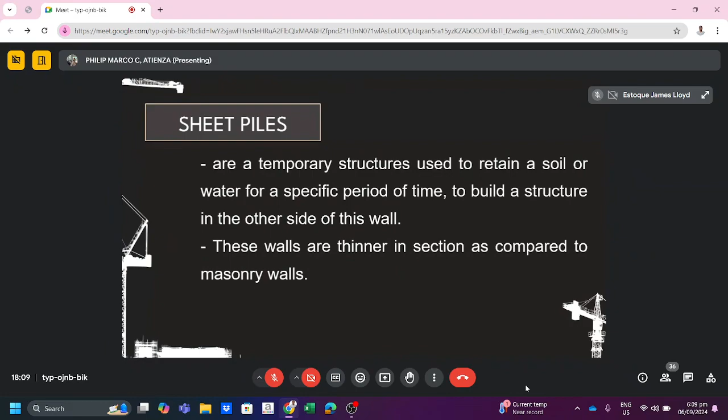So these walls are thinner in section as compared to masonry walls. So mao yung different usage sa ato ang sheet piles. So first is the waterfront structures in building wharfs and piers. And then second one is building diversion dams, riverbank protection, and then retaining the sides of cuts made in earth. So mao yung different nga usage sa ato ang sheet pile nga walls.

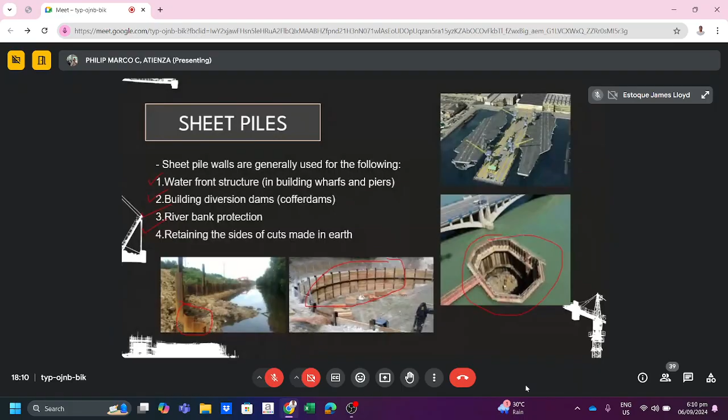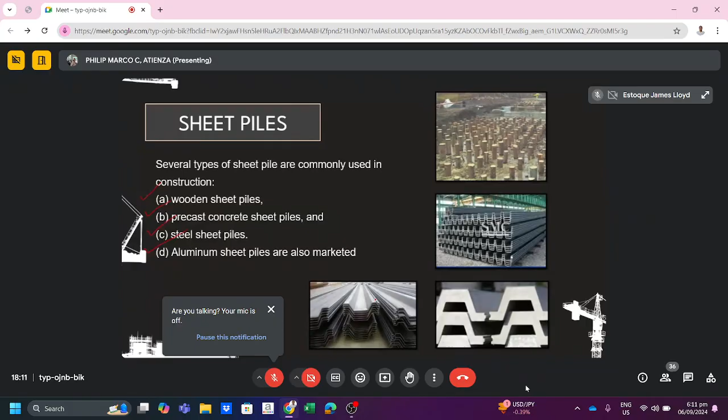So what are the several types of sheet piles commonly used in construction? First is the wooden sheet piles. The next is the precast concrete sheet piles, and then commonly used during construction is the steel sheet piles. And then the last one is the aluminum sheet piles, which are also marketed. So mao ni ang different types of sheet piles: wooden, precast concrete, steel, and lastly aluminum.

For the timber sheet piles or the wooden sheet piles, it is used commonly for temporary and light structures that are above the water table. It is also used for short spans and to resist light lateral loads. If used in permanent structures above the water level, it requires a preservative treatment, and even then its lifespan is short.

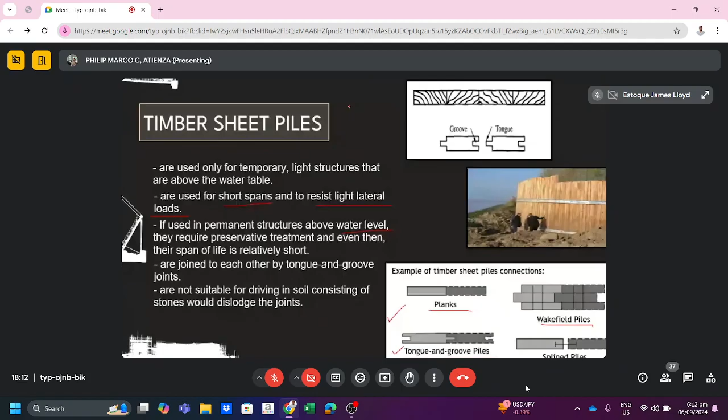Next is the reinforced concrete sheet piles. Usually the connections used are tongue and groove joints. And of course, since it is concrete, it is thick. It takes about 150 to 250 mm. So therefore, it is relatively heavy and bulky.

And since it has a large dimension, it displaces a large volume of solids during driving. So the design of piles has to take into account the large driving stresses, and suitable reinforcement has to be provided for this purpose. The sheet piles come panel per panel, not one whole length, then connected.

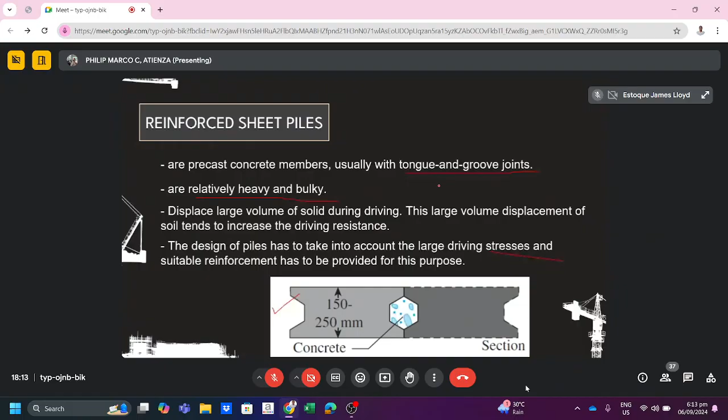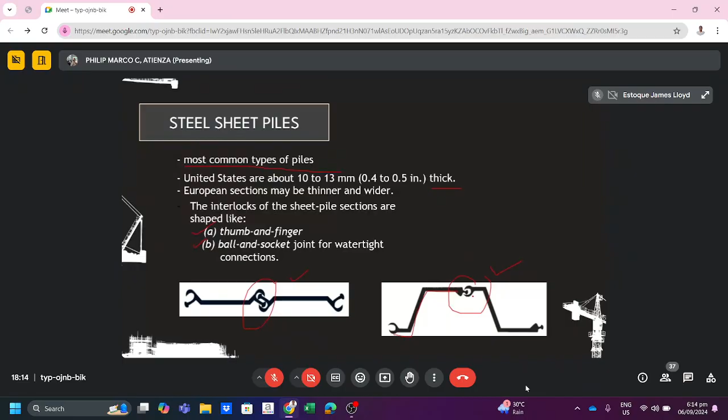And then next is the steel sheet pile, the most common type of piles. In the US, it is about 10 to 13 mm thick, so it is very thin. The interlocking of the sheet pile sections are shaped like the thumb and finger, and the ball and socket joint for watertight connections. This is the top view, and these are the connections, where two sheet piles are connected.

So what is the importance of steel sheet piles? Steel sheet piles are resistant to high driving stresses developed in hard or rocky material. Also, since it is steel, it is lighter in section. And it can be used several times, so if used in a certain project, it can be utilized again in the next project that needs sheet piles.

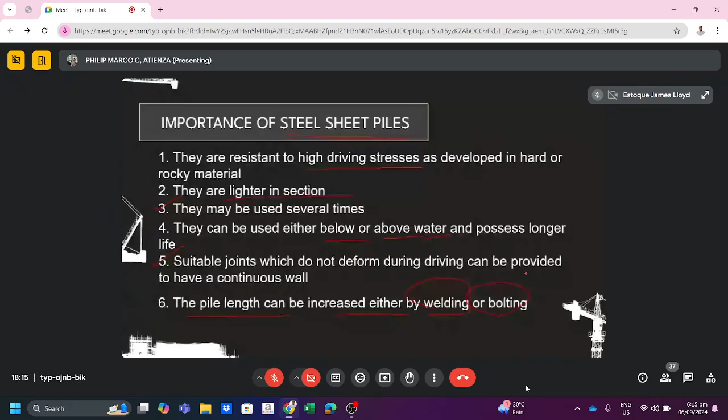Also, pwede siya magamit sa either below or above water level. Suitable joints which do not deform during driving can be provided to have a continuous wall. And then lastly, ang pile length can be increased either by welding or bolting. So, mao ni ang common nga ginabuhat sa steel sheet piles.

So, klaro ba class? Sabtan na so far? Any questions? Tara, sige.

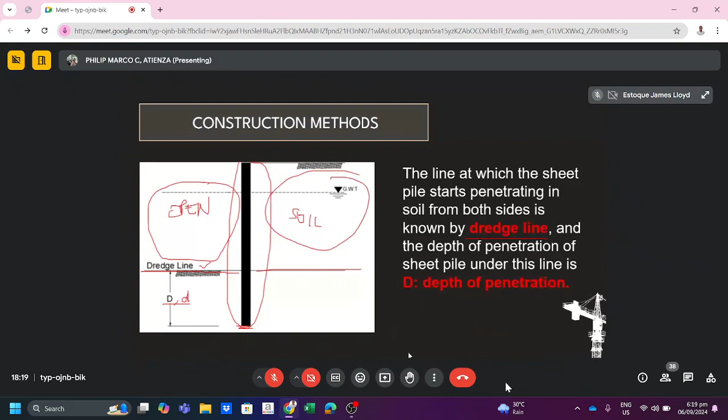So next, there are two types of sheet piles. First is the cantilever, and then second one is the anchored. So ang difference lang nila is sa anchored, naa siyay anchor. And then for the cantilever, ang sheet pile lang mismo. So gi-utilize lang niya ang depth of penetration. If this is our dredge line, so that is our depth of penetration.

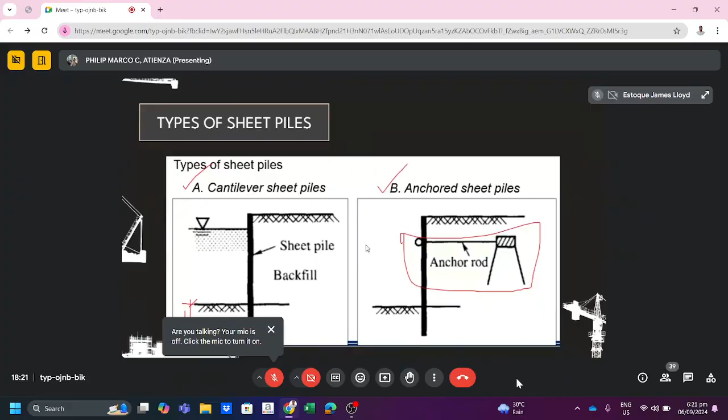So okay ra. So next is mag-solve the problems using the cantilever and the anchored sheet piles. Kita ninyo class? Sir. Sige, sige.

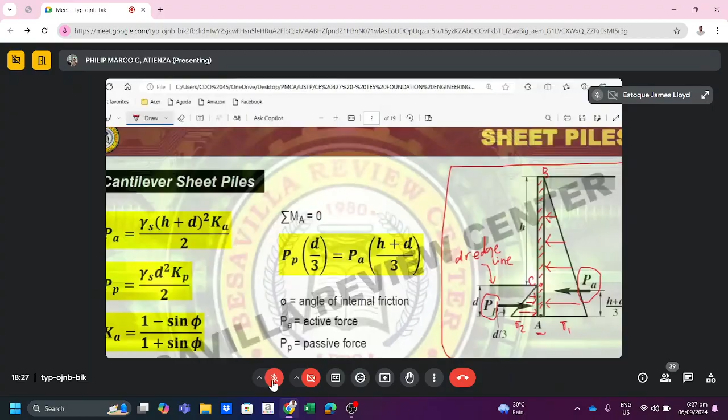Itong topic na to last time, we have the at rest, the active, and then the passive. So mao na ang PP, that is a passive force, and PA is the active force. And then the location of these forces from the bottom, so mao ni siya ang location niya, no, that is 1/3 of the triangle.

So H plus D is the total height of the right side nga pressure diagram. So H plus the depth of penetration D. That is from point B to point A. So mao nang H plus D. Then 1/3 ana mao na ang location sa atong active force from the bottom.

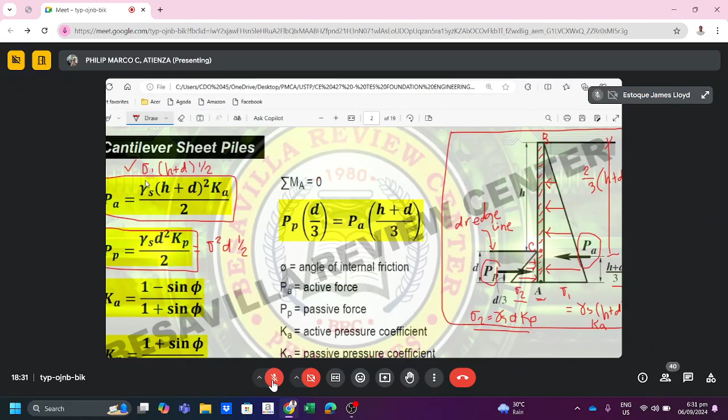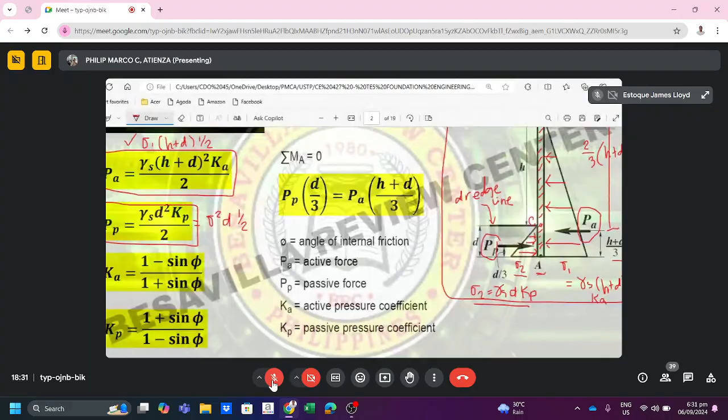And then, the coefficient of active pressure Ka is equal to 1 minus sine phi over 1 plus sine phi. And then Kp, the coefficient of passive pressure, is equal to 1 plus sine phi over 1 minus sine phi. So if we take moment about point A, summation of moment about point A, we can get this formula or the equilibrium.

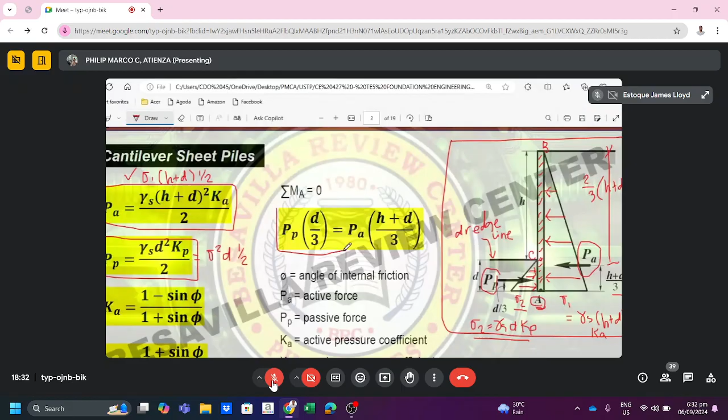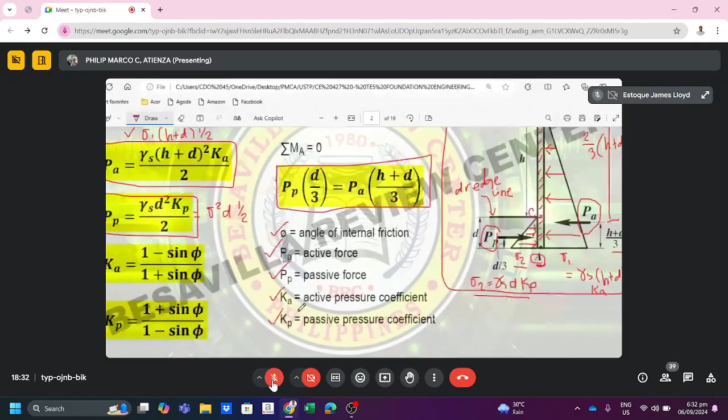Where again, theta is the angle of internal friction, PA is the active force, PP is the passive force, Ka is the active pressure coefficient, Kp is the passive pressure coefficient. So, ingon ani lang ang atong cantilever sheet pile problems. Ang critical lang ani is to interpret the word problem into a figure. After mag-draw mo sa figure, mag-draw ta sunod sa atong pressure diagram. Okay? So, any questions so far?

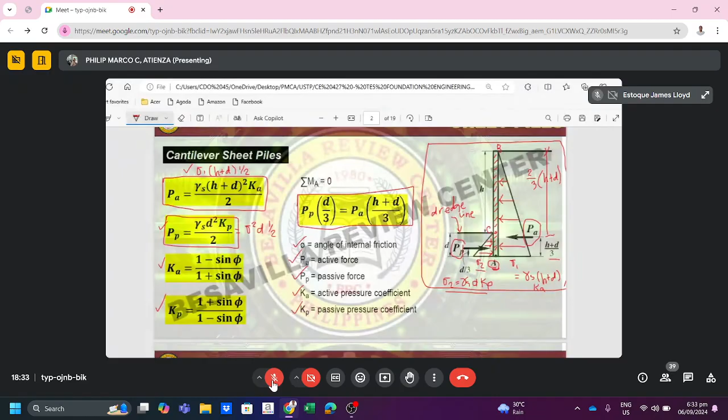Wala. Sige, let's have a sample problem. So we have here a sheet pile acting as a cantilever retaining wall that retains a soil 2 meters high with an angle of friction of 30 degrees and a unit weight of 18 kilonewton per cubic meter. So ang first gipangita is determine the required depth of penetration, that is D, with an allowance of 20% for shear development, and then assume that the pivot is at the foot of the pile. Second one is to determine the total active force on the sheet pile, and then the third one is the total passive force on the sheet pile.

So, i-draw ni mo na una ang ato ang given problem. So, first is cantilever nga retaining wall, this one. And then, ga-retain daw siya of 2 meters. So, from the top of the retained wall, let's say this is point B, up to the dredge line or point C, that is 2 meters. And then, ang naghatag dyan, angle of internal friction, that is theta, 30 degrees. And then, ang atong unit weight sa soil, 18 kilonewton per cubic meter.

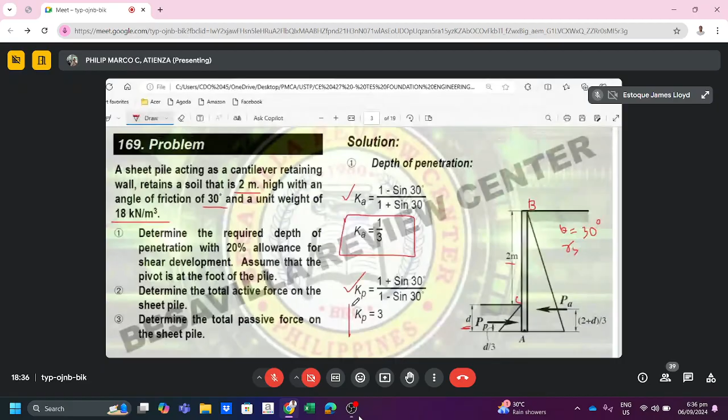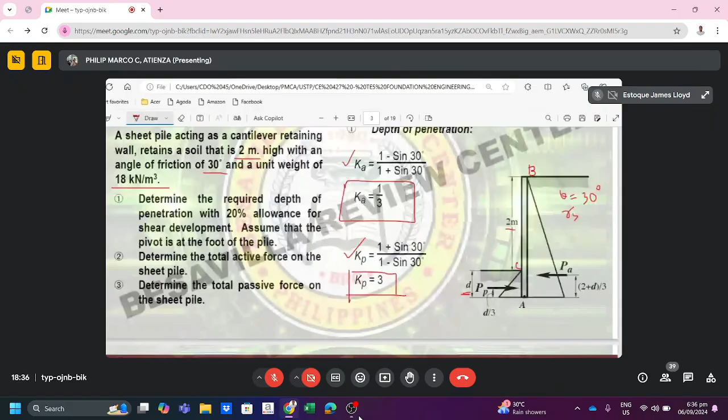So, sunod is to solve for the different coefficients. So, first one is the coefficient of active pressure. That is just equal to 1 minus sine theta over 1 plus sine theta. So, substituting the given angle of internal friction, we can get Ka as equal to 1/3. And then, Kp, the coefficient of passive pressure. So, substituting the given internal friction to the formula of the Kp, we can get that Kp is equal to 3. Okay? So, after that one, we will solve for the depth of penetration through summation of moment about this point.

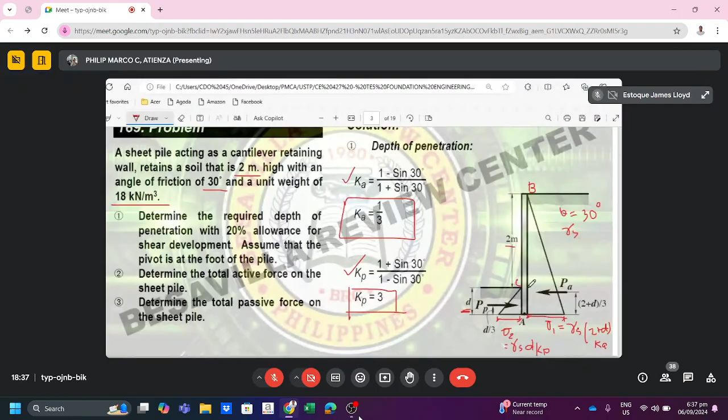If na natin Ka and Kp, we can get the different stresses, that is stress 1, in terms of D, 2 plus D times Ka. That is our stress 1. For stress 2, this one here, in terms of D gapon, that is the unit weight of the soil times the unknown depth of penetration times the coefficient Kp. So naa tay values sa unit weight of the soil, Kp and Ka. So kung mag-moment ta about this point A, maka-formulate ta og formula. And then, mabilin na is the unknown D or the depth of penetration.

So, if mag-moment ka about point A, that is equal to 0. So, that is just the active force times the moment arm 2 plus D over 3, the location of the active force from point A. That is equal to the passive force, Pp, times the moment arm. So, kabalo na ta sa formula. That is 1/2 times the Ka times the unit weight of the soil times 2 plus D squared. The 2 here is the height. That's the formula for PA. And then the moment arm 2 plus D over 3.

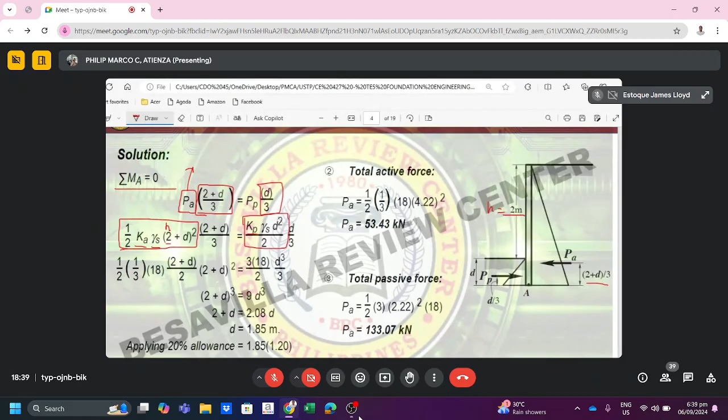Tapos equal to, this one here is the formula for the passive force or PP. So that is Kp times the unit weight of the soil times the unknown D or the depth of penetration squared over 2. So substituting everything, given ang unit weight of the soil, na-solve na ang Ka and Kp. So, ang mabilin nga unknown is the letter D, or the depth of penetration. So simplifying everything, we can get D equal to 1.85 meters. So this is our depth of penetration.

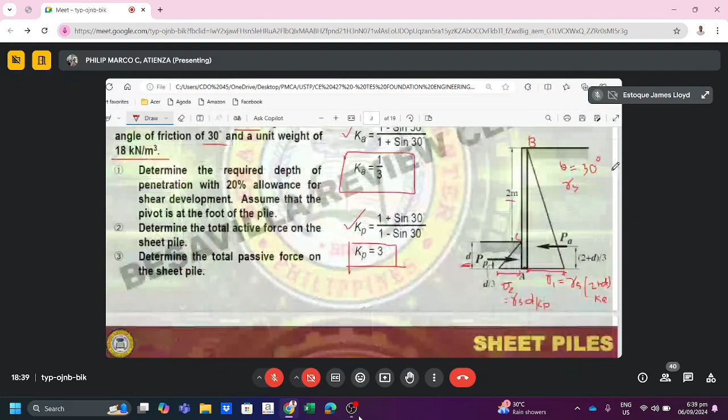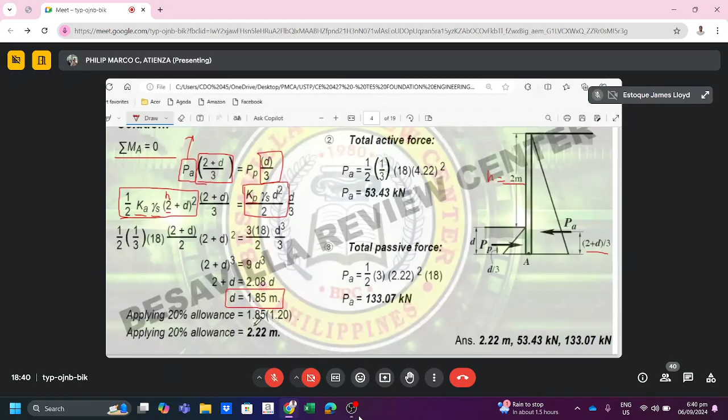Pero, giingon sa problem, the required depth of penetration with 20% allowance. So, dugangan pa daw siya og 20% for the shear development. So, ang atong nasolve nga D, that is equal to 1.85 meters, i-multiply lang nato og 1.2 para with 20% allowance na siya. So, our new D is 2.22 meters. So, this is our answer for number 1.

Klaro ba, class? Klaro pa? Sige, sige.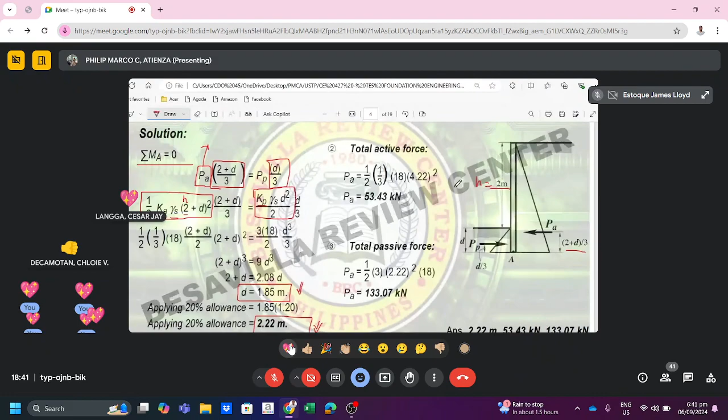Sige, sige. So next gipangita is the total active force. So na-solve na nato ni actually diri PA, pero unknown lang ang D. Ang atong gamiton nga D is the one with 20% allowance. So that is 2.22. So using the formula for the PA, the 1/2 times the coefficient Ka times the unit weight of the soil times the H plus D squared. That is the formula for the PA.

That is 2 plus 2.22, which is 4.22, that is H plus D. Where ang H is 2 meters and then ang D is the 2.22. So 4.22 na diretso ang gibutang dire. So solving for this, makuha nato nga ang active force is 53.43 kilonewton. And then lastly, the same lang gyapon using the formula for the PP, or the passive force.

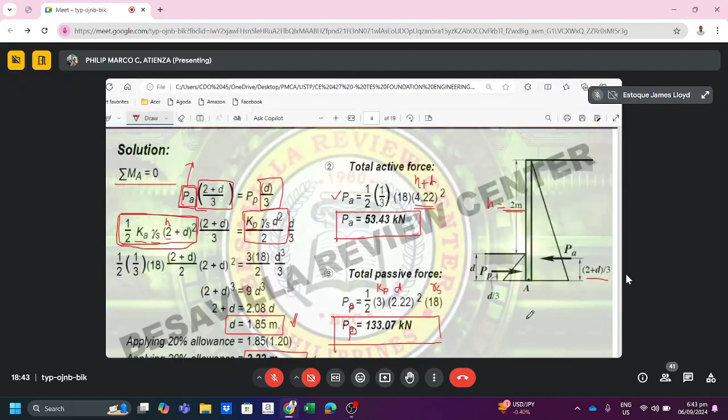So 1/2 times the KP, the coefficient KP, times D, and then this one here is the unit weight of the soil. So substituting everything, we can get that the total passive force is just equal to 133.07. Okay na? Sabdan ra?

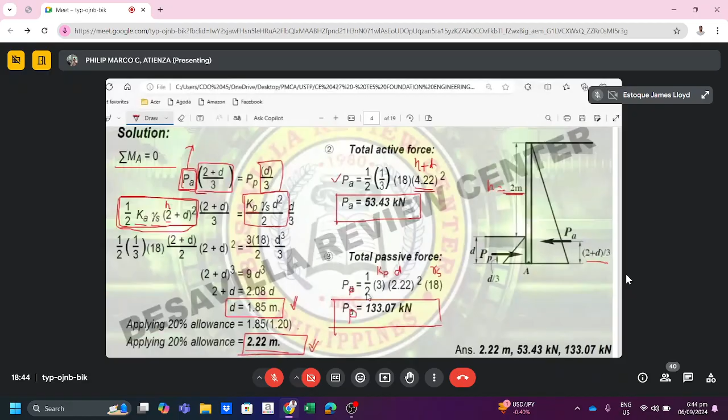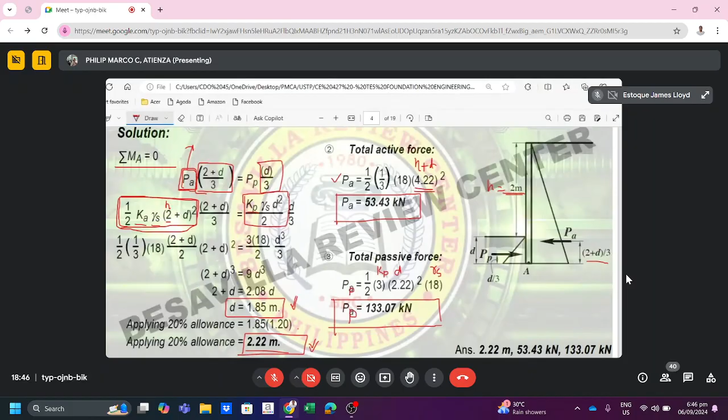Wait lang. Wait lang class ah. Okay, next problem. Oh, sige, this one.

So we have here another problem. A cantilever sheet pile is 8.2 meters long with a depth of embedment of 3.2. So ang whole length sa atong sheet pile is 8.2 meters, and then ang depth of embedment is 3.2, or the depth of penetration. The angle of friction of the soil supported by the sheet is 34 degrees, and it has a unit weight of 1.91 grams per cubic centimeter. There is a water table below the base of the sheet pile, and the unit weight of water is 9.81 kilonewton per cubic meter.

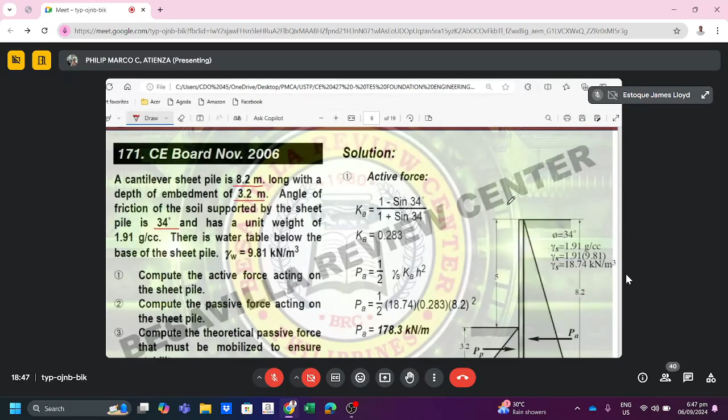So ato ni i-draw. Ang total length sa sheet pile is 8.2, and ang depth of embedment is 3.2. So from point A to point B, 8.2, minusan nato og depth of embedment, D, 3.2. So therefore, ang atong H is equal to 5 meters. Tapos, ang angle of internal friction is 34 degrees. The unit weight of the soil is 1.91. And ang gipangita is compute the active force on the sheet pile, the passive force acting on the sheet pile, and then the theoretical passive force that must be mobilized to ensure stability.

So first, you draw the problem, and then draw the pressure diagram. Ang water table is below the sheet pile, so wala siya effect sa atong sheet pile kay the location of the water table is below. Next is to convert the unit weight 1.91 into kilonewton per cubic meter. So the unit weight of the soil is 18.74 kilonewtons per cubic meter. After drawing the pressure diagrams, we solve for the different coefficients.

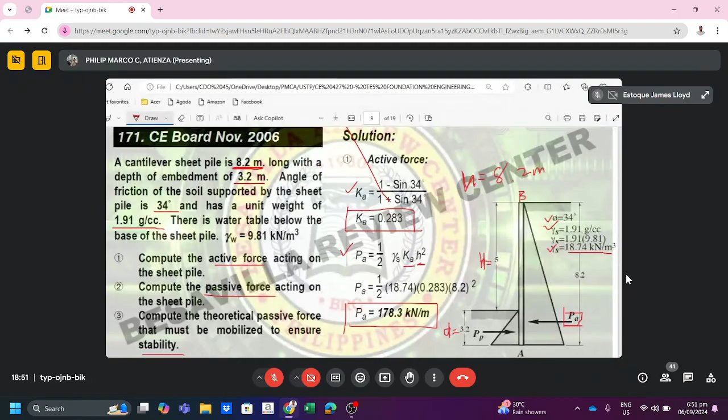So if this is the capital H, 5, ang H diri is the total height of the sheet pile, given na siya, 8.2 meters. Kibali, ang total height sa atong sheet pile from the top taman sa bottom is 8.2 meters. So substituting everything, the total active force for this problem is 178.3 kilonewton per meter. This force here, PA. Next ipangita is the passive force.

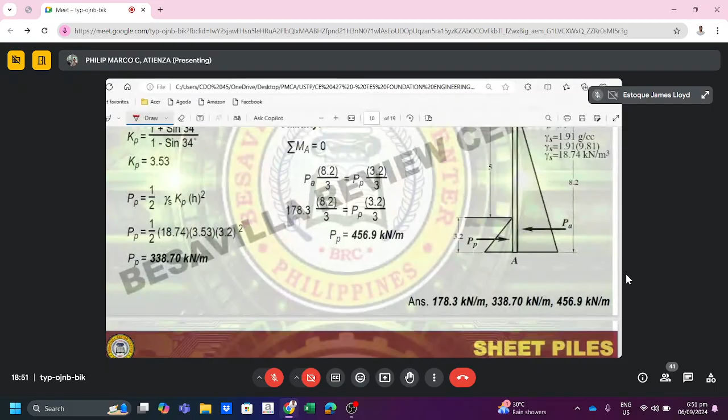So first, get the coefficient of passive pressure. That is 1 plus sine phi over 1 minus sine phi. So we can get Kp is equal to 3.53.

Using the passive force formula, that is 1/2 times the unit weight of the soil times the coefficient of passive pressure times height, which should be letter D, or the depth of penetration, which is equal to 3.2. And then this one here is the Kp, D, and then the unit weight of the soil. Solving for this, we can get that the total passive force is 338.70 kilonewton per meter.

So we already got the active force, and we also got the passive force. Next, what we're solving for is the theoretical passive force to ensure stability. To have a stable structure, the force acting on the right side should be equal to the force acting on the left side. So, summation of moment about point A.

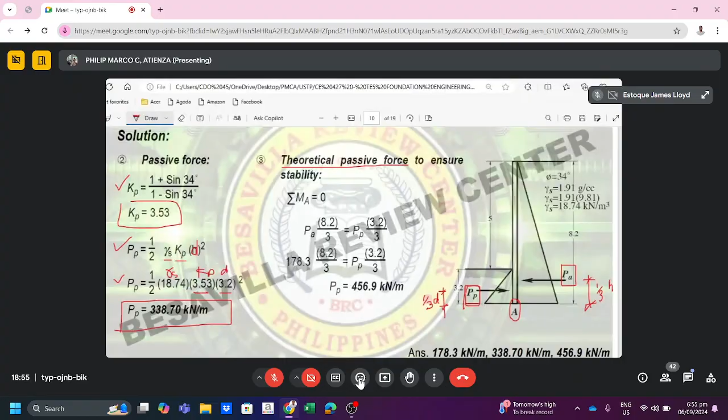Yes, that is grams per cubic centimeter. Just convert it into kilonewton. Okay, so what is the conversion? What do you convert grams into kilonewton with?

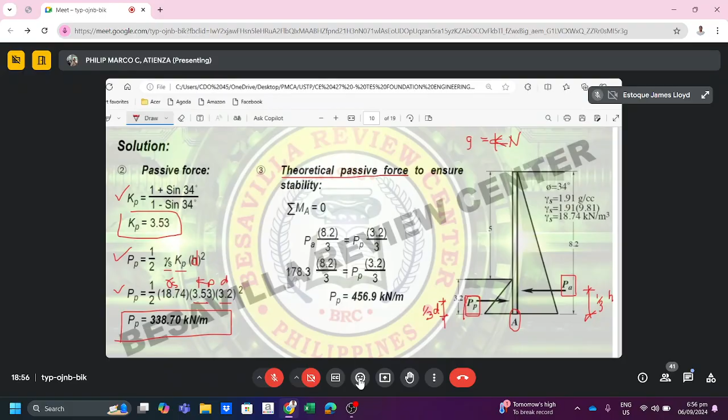Kilonewton is just equal to kilogram, or Newton, times meters per second squared. Is that right? Yes, kilo. Isn't kilonewton or Newton what you're asking about? Correct?

So in this conversion, the 9.81 is not the unit weight of water, that is the gravity. Its unit is meters per second squared. But the grams can be converted into a force from mass, that is kilogram or grams, whatever, converting it to the weight. Weight is a force, so simply multiply the mass by the gravity. Multiply it by the gravity.